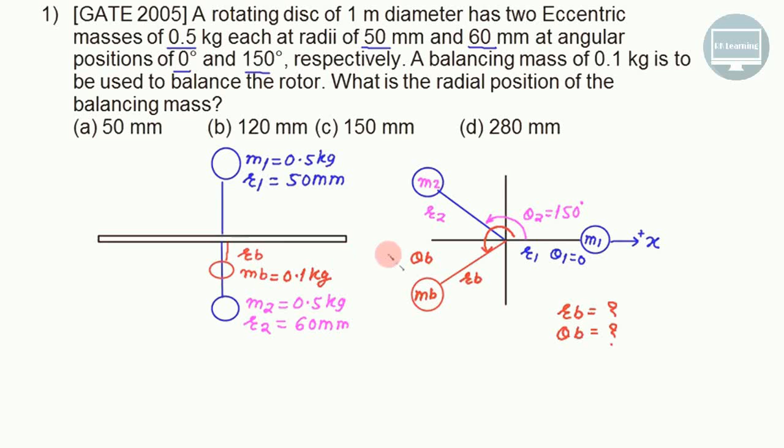So right now in my figure, how many unknowns do I have? One unknown is RB and one unknown is theta B. It means that I must have two equations. There is no question of moment. So sigma Fx is sufficient and sigma Fy is sufficient. So we'll only go for two forces: one is sigma Fx and one is sigma Fy. Let me check. Sigma Fx, rightward positive. Sign convention will be followed because we are using the positive x-axis.

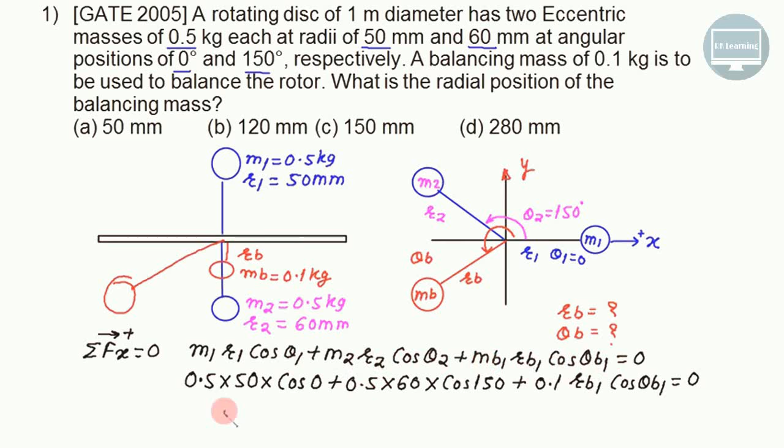First component is m1 r1 cos theta 1, m2 r2 cos theta 2, mb1 rb1 cos theta b1. Substitute all values and find out rb1 cos theta b1. This answer comes out to be 9.81 and it is a positive answer, so make this a rightward arrow. Follow sign convention. Next is sigma Fy, vertically upward positive, must equal 0. All these terms will be replaced by sine terms, that's all. So substitute all these values and find out the value of RB1 into sine of theta B1.

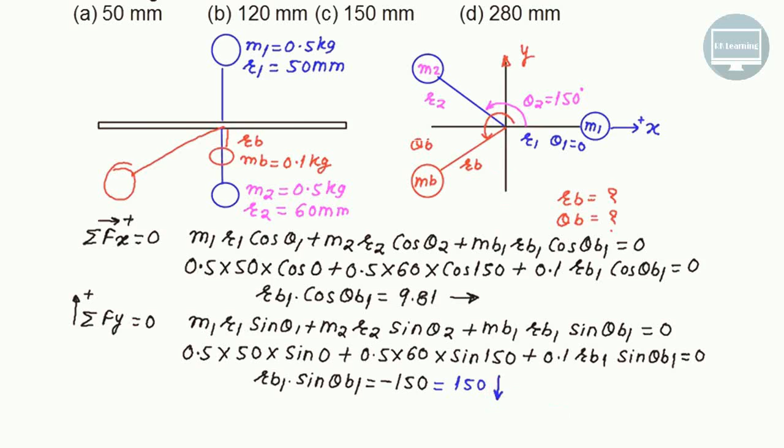Your answer comes out to be minus 150, but always write the positive answer. So this one is 150. Where is it? Is it downward? So show this force downward. So you first construct this vector going to the right. The approximate vector will be like this. On the tip of this one, you construct the second vector. That is called a vector diagram. And then close this. This one is 9.81.

And this one 150. And this angle is therefore theta B1, because if you take tan, this divided by this one, is tan of theta B1. Opposite upon adjacent is 150 divided by 9.81. Solve this one; that is theta B1. Then use either this equation or this equation and solve for RB1. The final answer is 151.6.

But remember here, your x-axis is this way. So if you have to give the answer of this one, your answer will be this one. All angles are measured from the positive x-axis. So the angle at which you have to attach this mass will be equal to 360 minus 86.29.

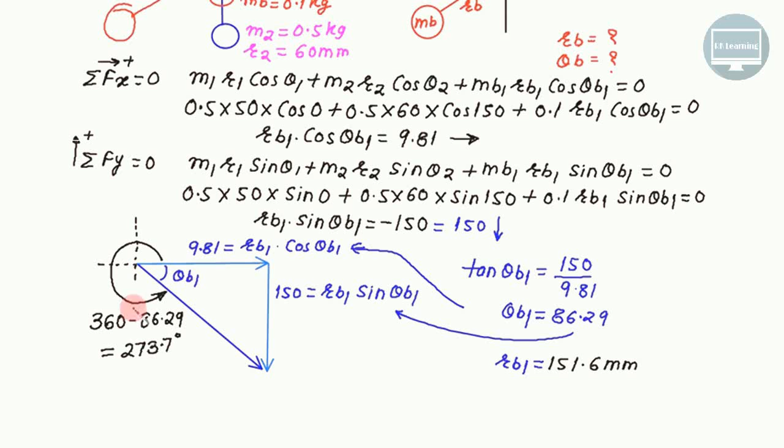So your angle with respect to x is 273.7. And all the masses are in the same plane. They are in the same plane. Masses are given, their radii are given, and their angular positions are also given. And if you read the problem, you can see the line

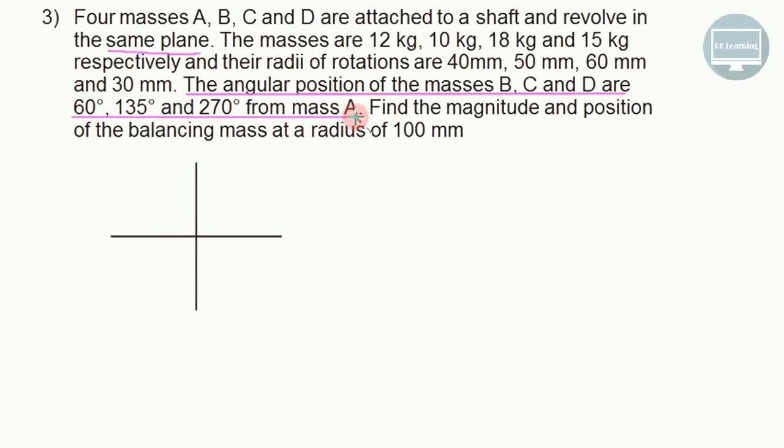angular positions of the masses B, C, D are 60, 135 from mass A. We have to fix up mass A first. So let me fix up mass here at 0 angle. Then it is very convenient to show other masses. So let me fix up this one. Let's call this one A. So what is theta A? What is MA? MA is 12.

Now what is the angle between B and A? 60. So 60 we will show somewhere here. What is the mass of B? 10. What is the radius of A? 40. What is this angle? And what is the radius of B? 50.

Then the third mass is attached at what angle? 135. With respect to what? A. So that will come in this quadrant. This angle is theta C. What is the mass C? 18 kg. Radius it is attached at: 60. And what is the value of theta C? 135. And do you have one more mass?

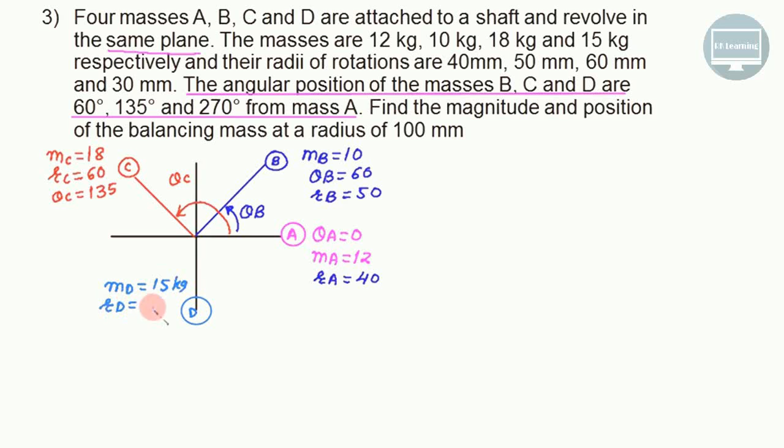That is what? 270. Is the 270 exactly here? This one is mass D. What is this mass? 15 kg. What radius? 30 mm. And what is this angular distance? 270.

What is he interested in? Find the magnitude and position of the balancing mass at radius equal to 100. So we don't know where it is, but I have a space here. So right now I will show this mass. I don't know what this total angle is. Theta B. That is another unknown for me. But the radius is known to me, radius equals 100.

And this problem is a single plane problem, so only sigma F is sufficient. It means that sigma Fx must equal 0. I will write this term, okay? I will write this: mi ri cos of theta i. This is fine? Now I will directly make entries one by one.

We'll start with MA. MA equals 12. Distance equals 40. Angle equals 0. Next term. Mass equals 10. Radius equals 50. Angle equals 60. Plus. Next mass, 18. Radius equals 60. Angle equals 135.

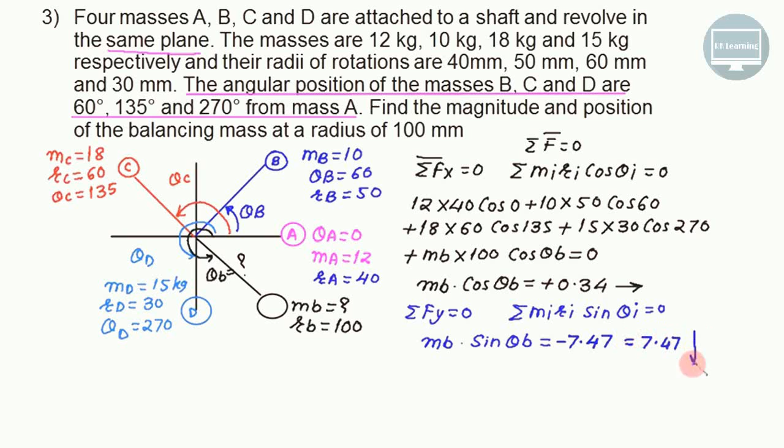First use the x vector. So x is going this way and y is going downward. So if you join this, you will get your resultant vector. This angle is theta B. This cos term value is 0.34 and this value is 7.47. So you can take tan theta. Is this value 360 minus 87.4?

So actually this should not be theta B. Theta B is this one.